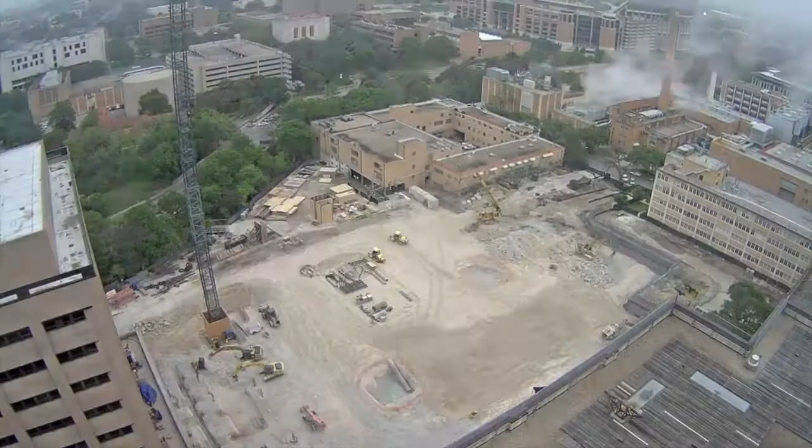Of course, I don't know. In tons, I couldn't put a number on it, but I'm pretty sure it's a lot. Like in dollars? 4 tons, be my guess. Probably like 10 tons, I'm not sure.

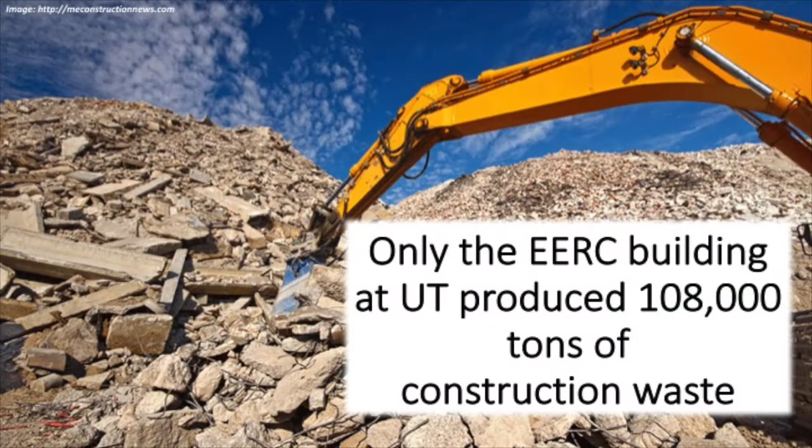108,000 tons of waste. Wow, oh. Yes. And my guess is totally wrong. Oh my gosh, yeah, it's crazy.

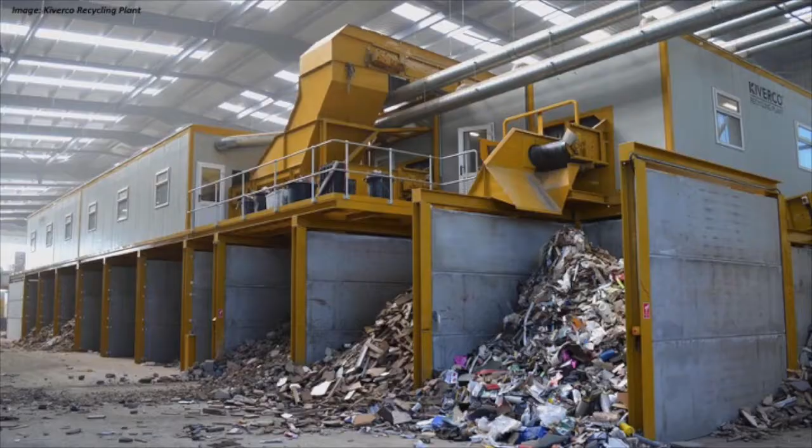I'll guess 25 million. I don't know, like a couple million. Oh my gosh, it's crazy. Okay, yeah, it's a little... no, more than what I get.

The Green Fund is a program run by the Office of Sustainability that's supported through undergraduate tuition funds, and that goes to supporting sustainability initiatives across campus that are led by students, faculty, or staff.

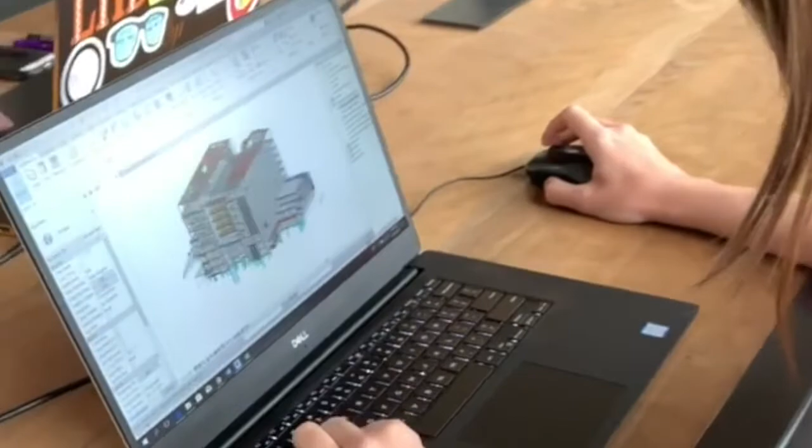The idea with this project started from us trying to automate the estimation of construction waste from construction sites. So what we focused on is trying to estimate major construction waste streams, such as concrete and drywall, in sites on campus, so we can better understand what happens to the construction waste and how much of it we generate in these sites, and whether we can calculate those numbers automatically and how accurate they are.

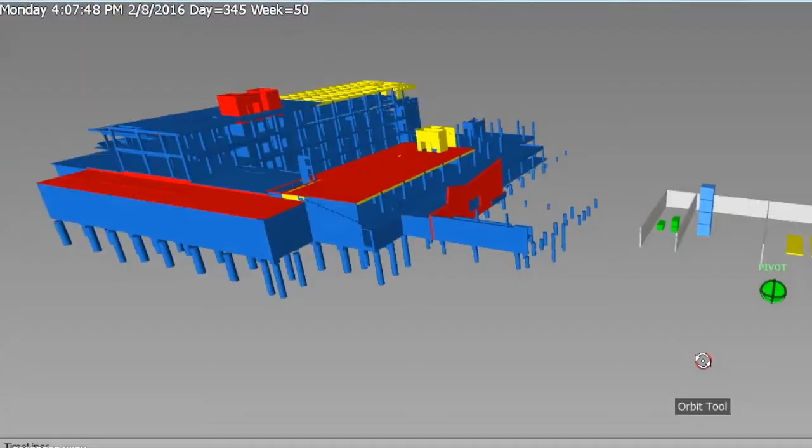In the second year of the project, we focused on better illustrating where the construction waste is being generated from, and whether we can reutilize that same waste in that same project based on information on the activities that will happen from the construction schedule. We're trying to illustrate in a very intuitive manner where this is all happening in a construction site, and where we can take advantage of other future activities in the site to reutilize that waste.

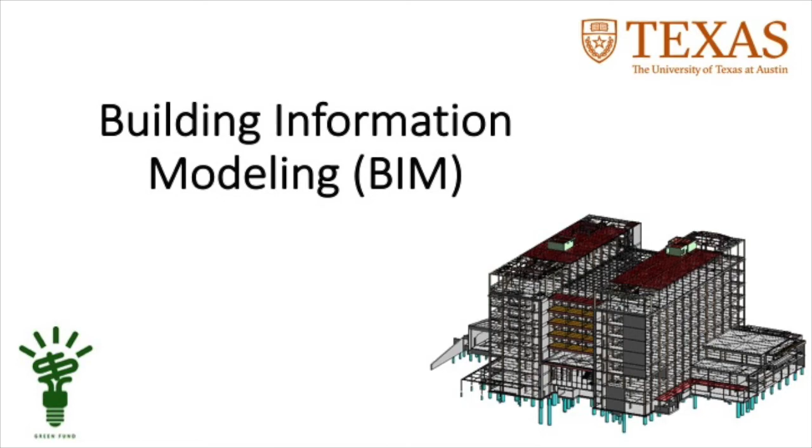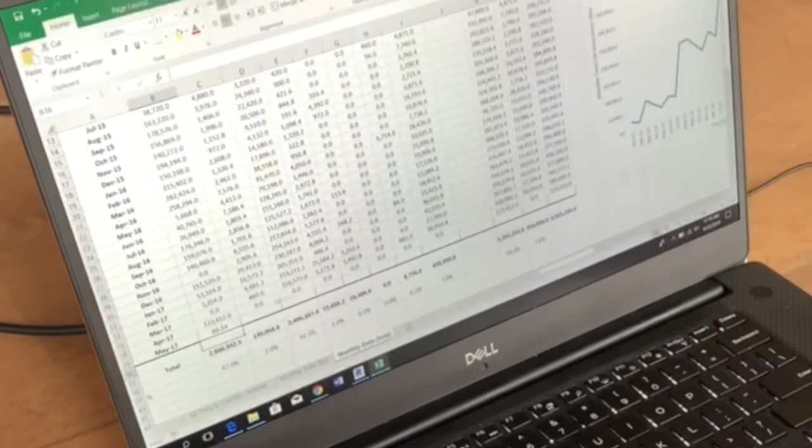Building information modeling is the digital representation of both the physical and the functional characteristics of a facility, which can be a building, a road, a bridge, or anything that is built in construction. In these models we have various types of information, such as construction materials and data about the construction activities, and we can also link this to other databases.

So you can think of BIM as a big recollection of information that can guide us through a better and more intelligent decision-making process.

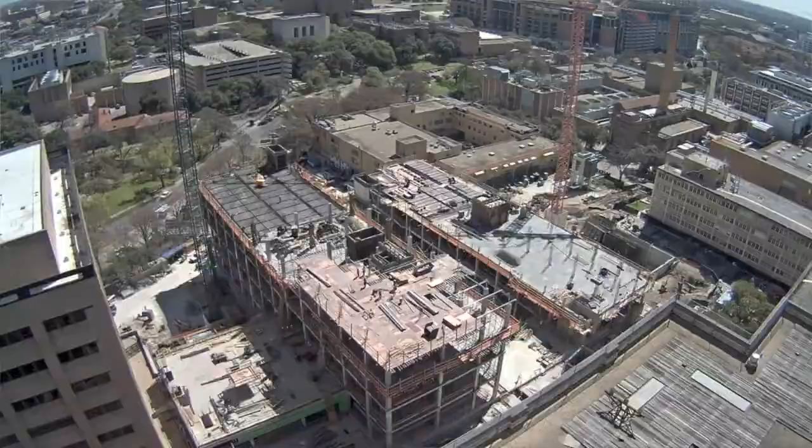It was 433,000 square feet was the new piece, and it took us a little over 3 years to build it. So BIM we used extensively to simulate how a big piece of stainless steel accent piece would roll in. If you build it traditionally, where you did the glass and the masonry first, there would be no way to install the stainless. So we used BIM to visualize that and just confirm construction clearances, and then actually it dictated our installation sequence.

4D simulation is when you take a building information model and specifically link it to a construction schedule. So the 4D, the fourth dimension, is just time. So you literally see the construction being built over time.

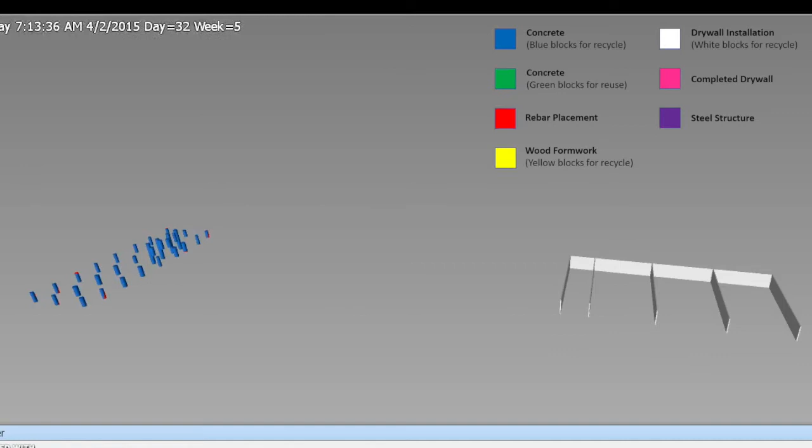This is Navisworks, the software we use to make the model 4D by connecting the construction schedule to the 3D elements. As you can see, there are some different colors that show up. The blue is the concrete that's being poured on site. The red is the rebar reinforcement used to reinforce the concrete, and the yellow is the wooden formwork used to hold the concrete during the pour.

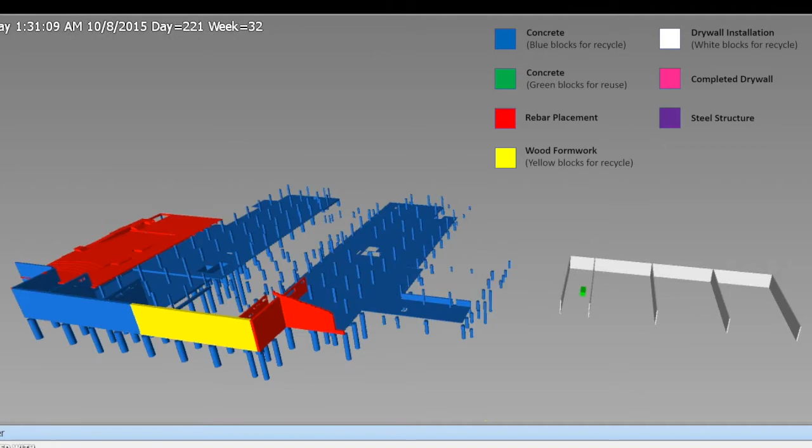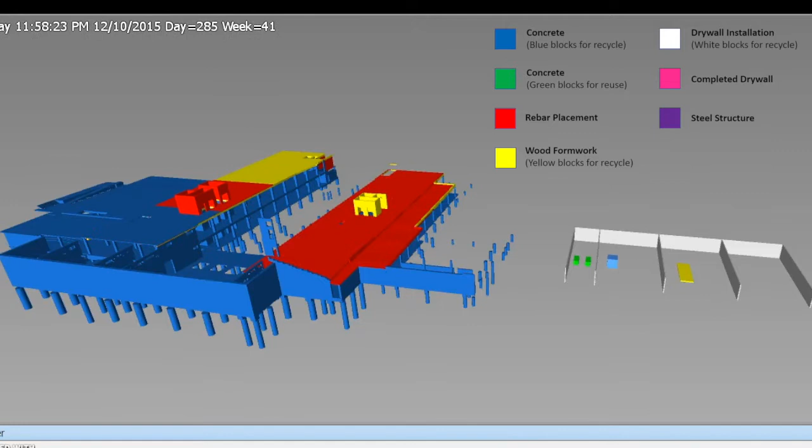Now on the right, you can see some blocks that pop up, and these represent waste that's produced from the construction of this building. The green represents concrete that's being reused back on site later. The blue represents concrete that will be recycled but off-site. And the yellow represents wooden formwork that will be recycled off-site as well.

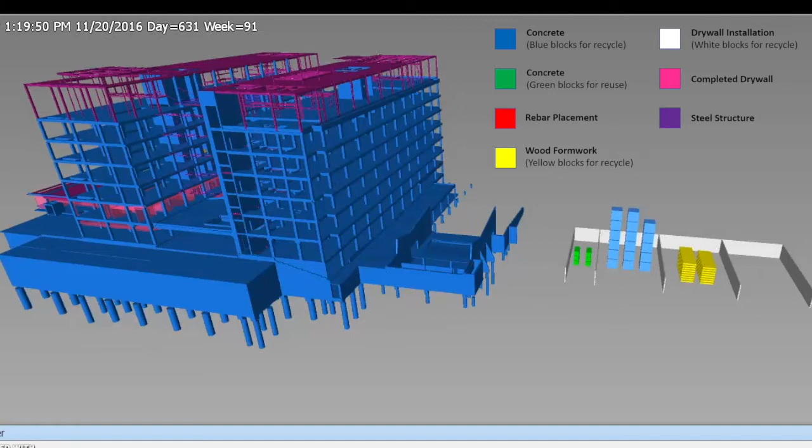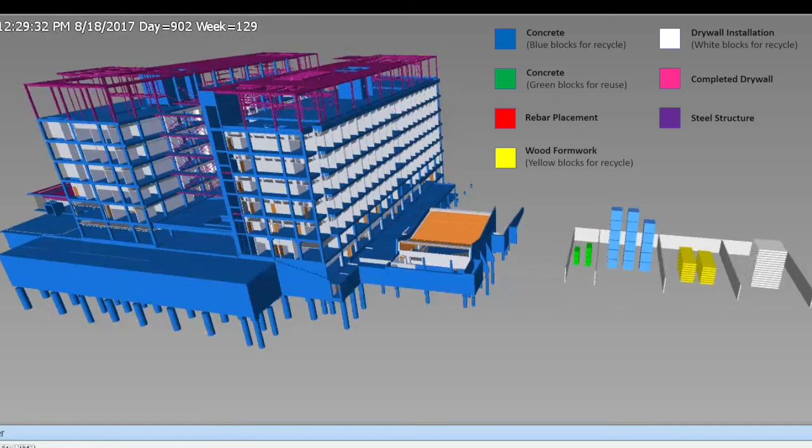Pink is currently showing up now as well, and this represents the installation of drywall on each floor. Once the installation is completed on the respective floors, the whole floor will turn white, and also white drywall will show up in the waste bins to be hauled off-site. Theoretically, we would like all of these materials to be reused, and the idea is to show how much waste is actually being produced, and to encourage industry professionals to think about ways in which we can reduce this waste that is being visualized on the side.

I think that the benefits of on-site reuse are pretty incredible. It's very efficient compared to other forms of reuse or recycling, and I think that demonstrating that this is possible, and giving an example of a precedent, can be very useful not only for contractors moving forward, but also for engineering students and architecture students, so that they can begin to think of reuse earlier in stages of design.

I inherently believe that when we're looking at waste, we need to look at reducing first our usage of materials, right? So we need to just reduce how much materials we use on the front end. And then when we are looking at having waste materials, we need to identify what would be ways that we can recycle or reuse these materials.

With regards to on-site practices, it's really thinking about it from the very beginning in terms of your plan. Where can it be used? Who are my potential recycling facilities? Whether it's on the project or maybe it's someplace off-site.

I think that addressing waste at earlier stages of construction is critical. So not only addressing waste after a building is demolished, but addressing that issue beforehand, so that there are strategies for deconstructing the building and preserving waste in a more complete form is important.